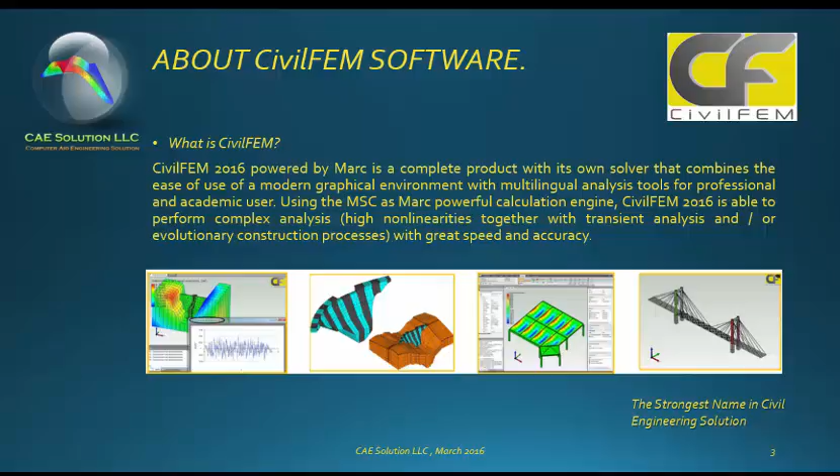Let's talk about some features of CivilFEM. We have a very user-friendly and easy to learn software. It's very easy to learn, it's very friendly.

CivilFEM is configurable, including the ability to import and export geometry, and the user has the ability to enter data using parametric formulas. You can develop scripts and macros with Python language, meaning you can make your own routines according to the requirements or needs of the client. We have object-oriented architecture, automatic analysis and reporting. It's a very easy to use software.

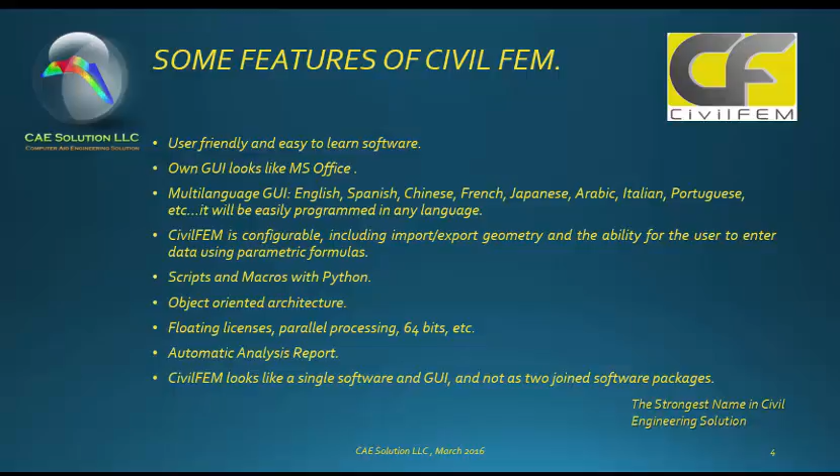Let's talk now a little bit more about CivilFEM software. CivilFEM is a multiple integrated software because it works simultaneously with a powerful solver with the Marc technology. At the same time you can perform Python scripts, as I told before. You can develop macros, you can have your own parameters, and all of this information is parallel, is simultaneous.

Also, you can have advanced civil engineering applications such as bridges, dams, seismic applications, pre-stressed concrete, reinforced concrete, tunnels, geotechnicals. The software supports multiple languages and flexible units. Another important thing is that we can perform nuclear power plant design, and you have all of these characteristics together in one powerful software. That is CivilFEM.

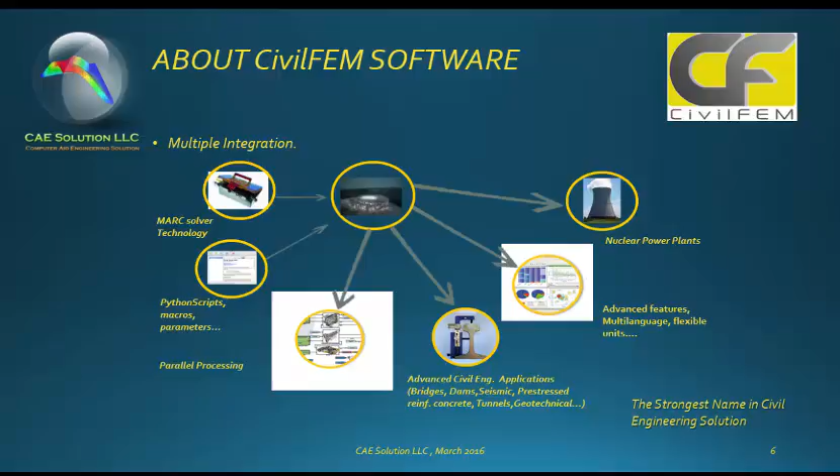If we talk a little bit about CivilFEM capabilities, in structural analysis we can perform linear and nonlinear, static and dynamic analysis. We can perform linear and nonlinear buckling analysis, modal and spectrum analysis, harmonic analysis. We can evaluate time-dependent variables like creep and shrinkage, among others. We can evaluate advanced material behavior. We can perform staged construction. We can evaluate cracking and crack propagation, heat transfer analysis, and seepage analysis, among others.

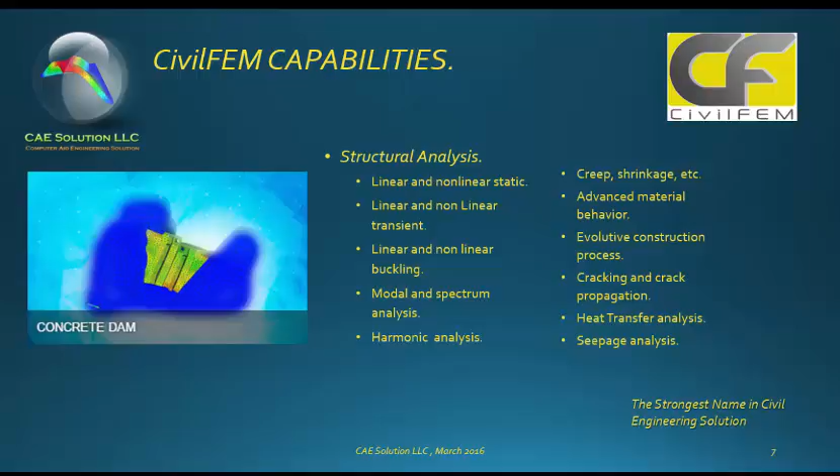We can handle and support a lot of material behaviors, such as isotropic, orthotropic, and anisotropic materials. We support different plasticity models, time-dependent behavior like shrinkage and creep, viscoelasticity behavior, and viscoplasticity behavior. We have temperature-dependent properties for heat transfer analysis. We can manage user crack data for crack propagation. We can perform nonlinear reinforced concrete analysis. We also have specific soil and rock behavior models, such as the elastic model, the Drucker-Prager model, Mohr-Coulomb, among others.

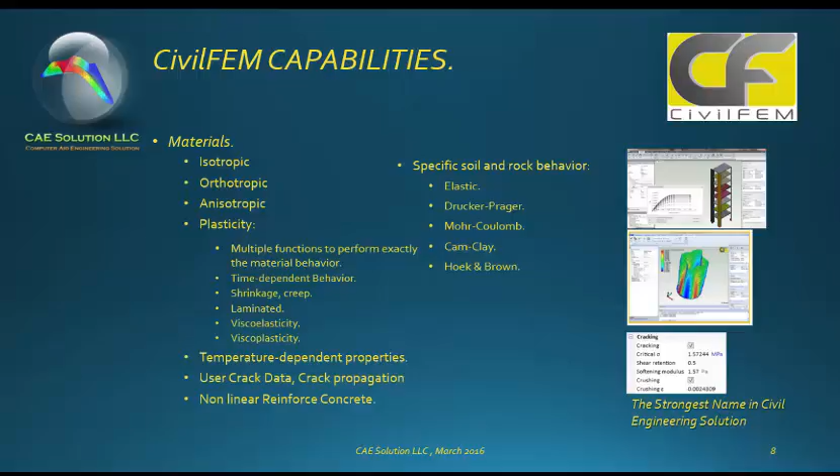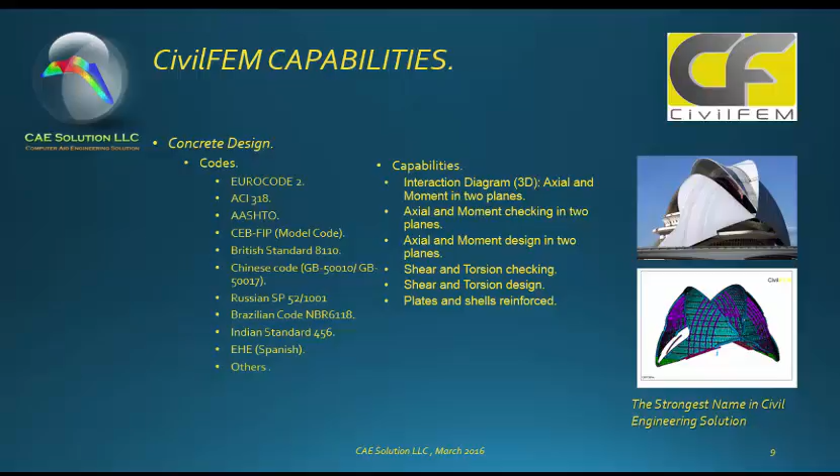In concrete design, we support a lot of codes, as you can see in the slide, such as ACI in the United States, Eurocode, the CEB-FIP model, the Russian code, Brazilian code, among others. Other capabilities in concrete design include interaction diagrams in 3D, axial and moment checking in two planes, shear and torsion checking, shear and torsion design, and plate and shell reinforcement. We also support a lot of steel design codes, such as Eurocode 3, AISC both ASD and LRFD models, bridge design specifications, British standards, Indian standards, among others.

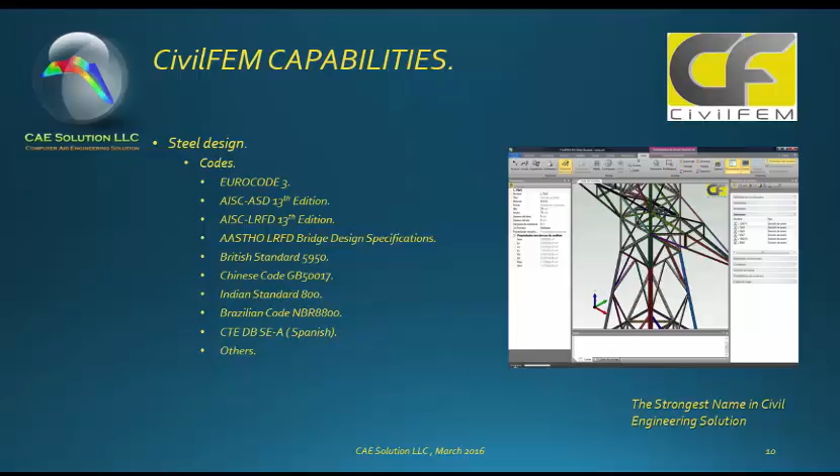CivilFEM is discretized into several products, such as FEM Intro, FEM Advanced, Expert, add-on Marc, nuclear power plants, and the student versions.

Let's start talking a little bit, showing FEM Intro. Basically, FEM Intro is the software that works on structural civil engineering and structural problems, such as earthquake analysis, among others, with basic nonlinearities and dynamics.

The specific civil engineering and structural analysis outputs, such as load path history, automatic response spectrums for seismic analysis, and nonlinear time history analysis, are fully supported here in CivilFEM Intro. We have highly accurate solutions because all material properties are time dependent and allow the definition of true stress-strain diagrams and advanced nonlinear behavior.

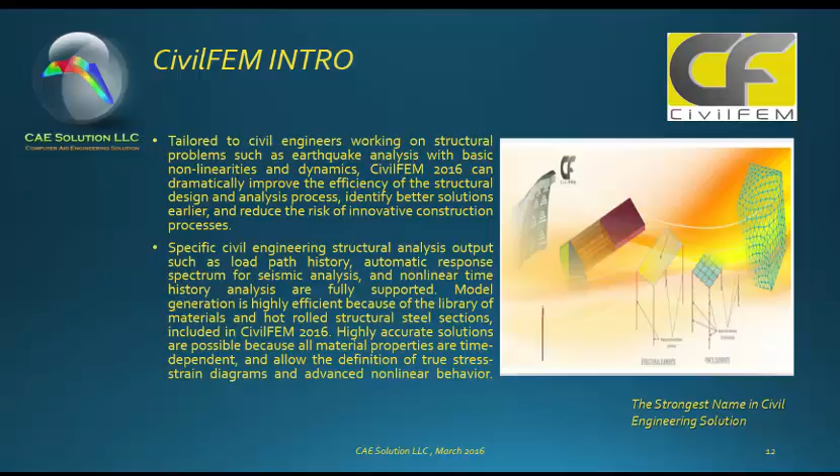In CivilFEM Intro, we have linear structural simulation with some nonlinearities. We can perform static and transient analysis, nonlinear transient analysis, modal and spectral seismic analysis. We can check all design requirements according to steel and concrete codes. We can evaluate large deflections and large strains.

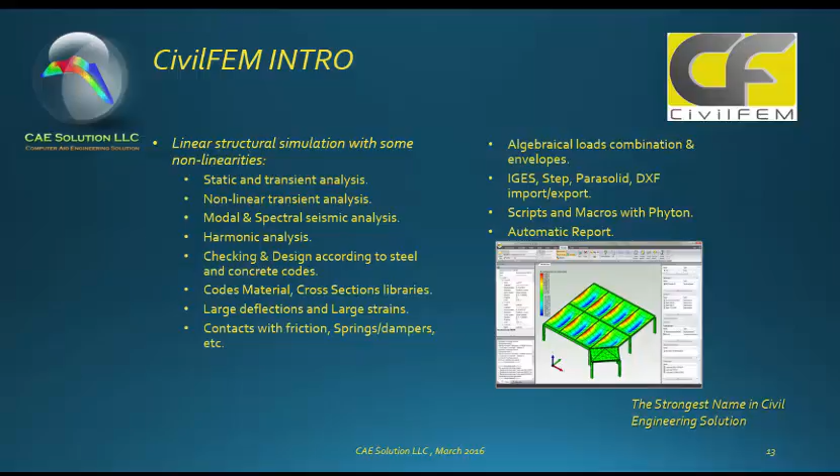We can evaluate contact with friction using springs and dampers, among others. We can import or export from different applications or formats such as DXF, Parasolid, among others. We can have scripts and macros made to our needs with Python, and make automatic reports, among other things.

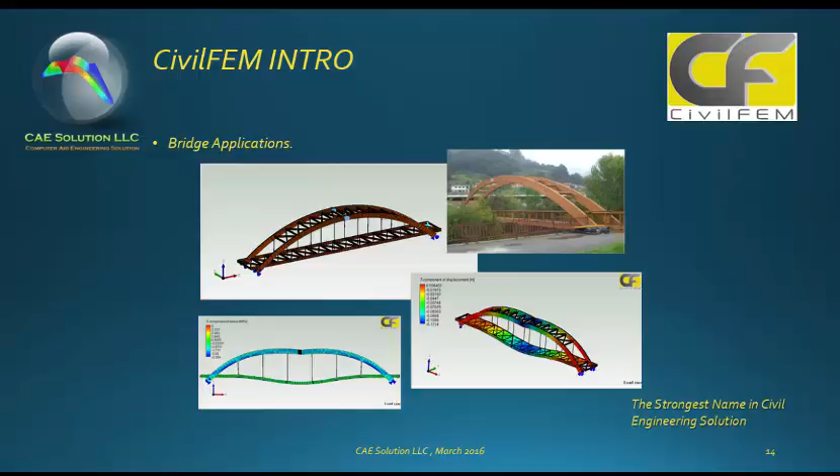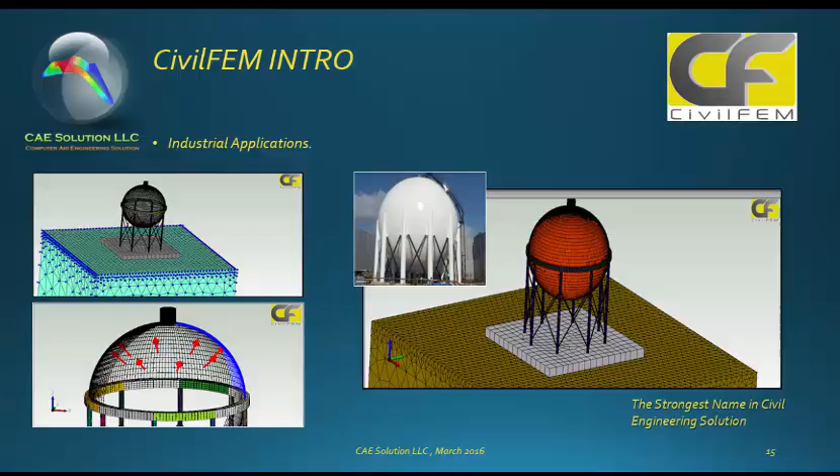In CivilFEM Intro, you can see several applications. For example, in bridges, you can check the deformation and stresses of the structure. We also have industrial applications, and steel static and nonlinear analysis for transmission towers.

We have seismic analysis tools, with user spectrum definition independently from the code. You can enter and make your spectrum no matter what code you're using. There's also automatic mode combination according to the code specifications when you're making spectral response spectrum analysis.

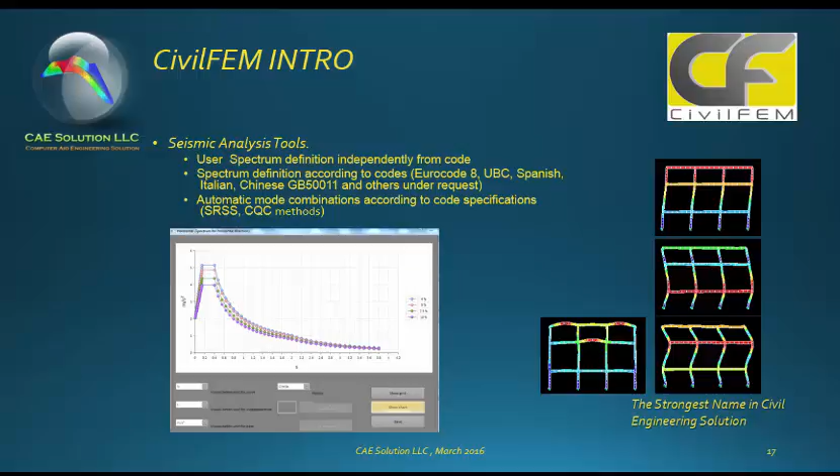In this slide you can see the model of the Tacoma Bridge study case. It was modeled in order for us to evaluate and compare the behavior that bridge took on at that time.

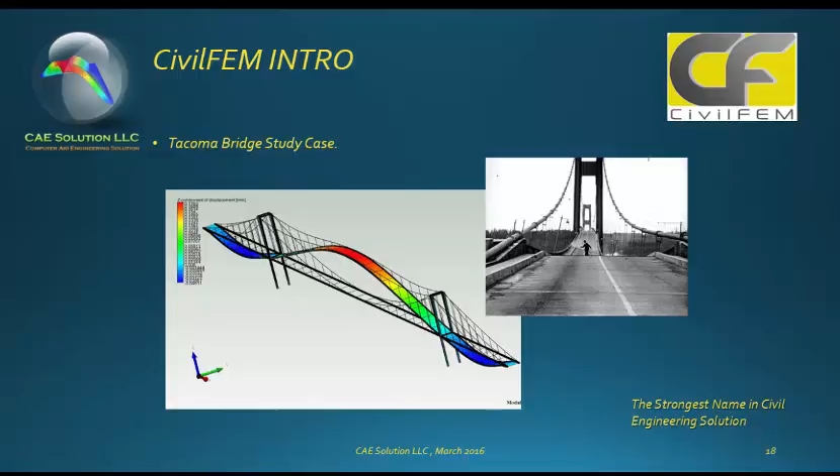Let's talk a little about CivilFEM Advanced. It has the same capabilities as CivilFEM Intro, plus nonlinear buckling, nonlinear evolutive construction process, nonlinear strain-stress diagrams taking into account plasticity and user crack data, nonlinear reinforced concrete analysis, concrete time-dependent properties such as creep and shrinkage, the material model exponential cap, user crack data, prestressed reinforced concrete, bridge tools, tunnels, retaining walls analysis, piles and micropiles analysis, among others.

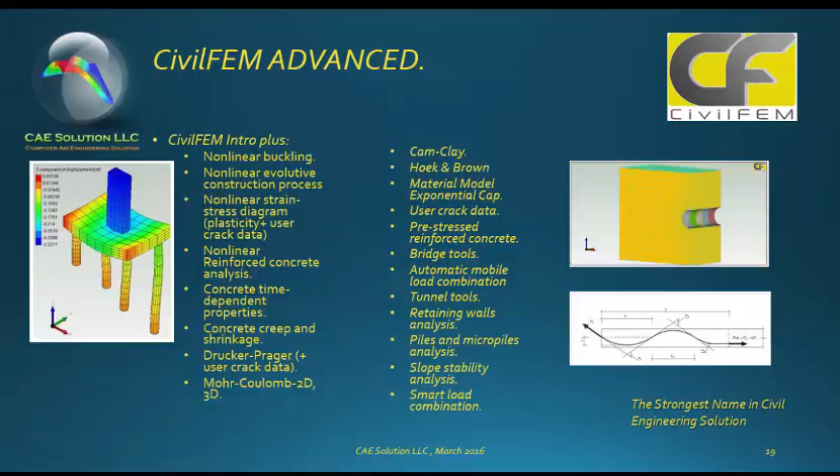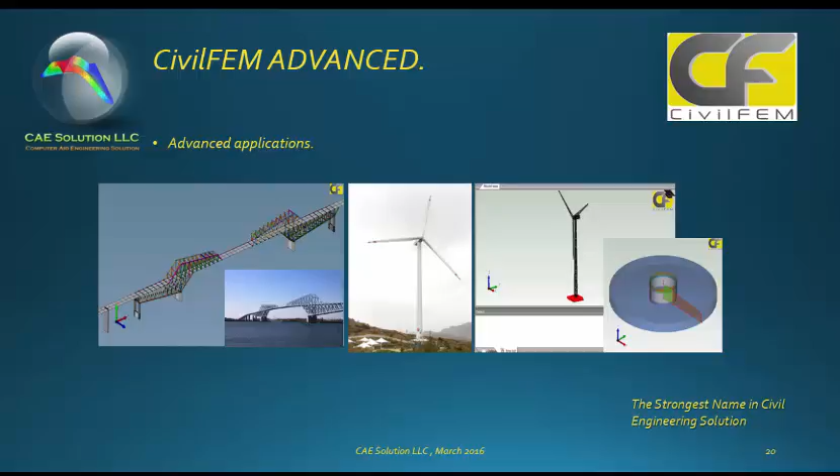Here you have advanced applications of CivilFEM in bridges, wind turbines, and foundation design.

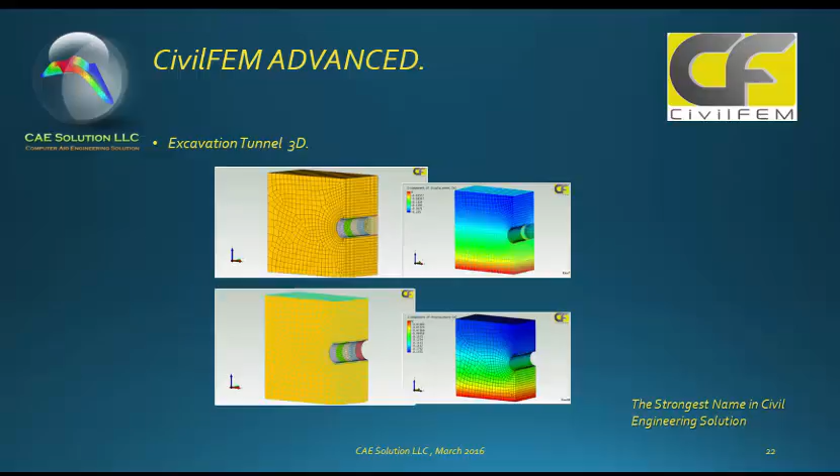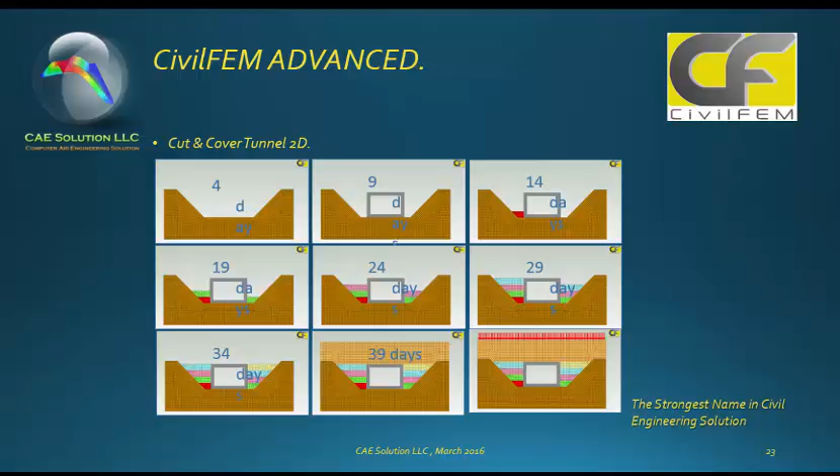You can also have staged constructions in tunnel applications. Here you can see, as a function of time, how the construction process, stresses, and results vary over time.

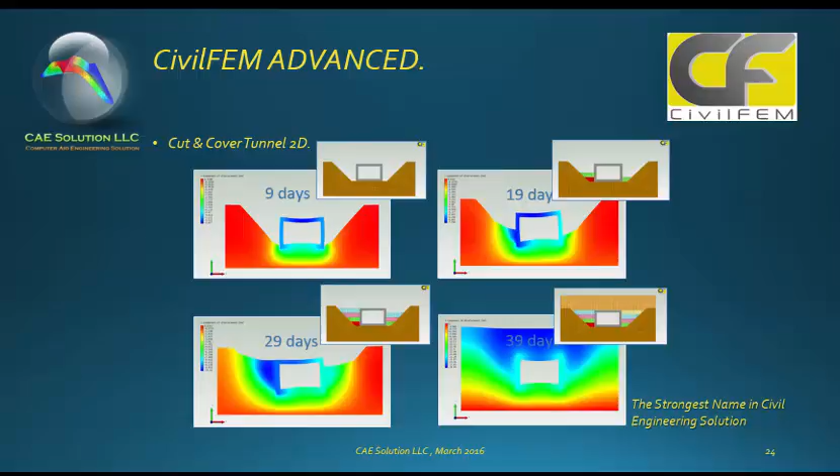As I told you before, you can evaluate and perform retaining wall behavior, taking into account all interactions between the soil and the structure of the retaining wall.

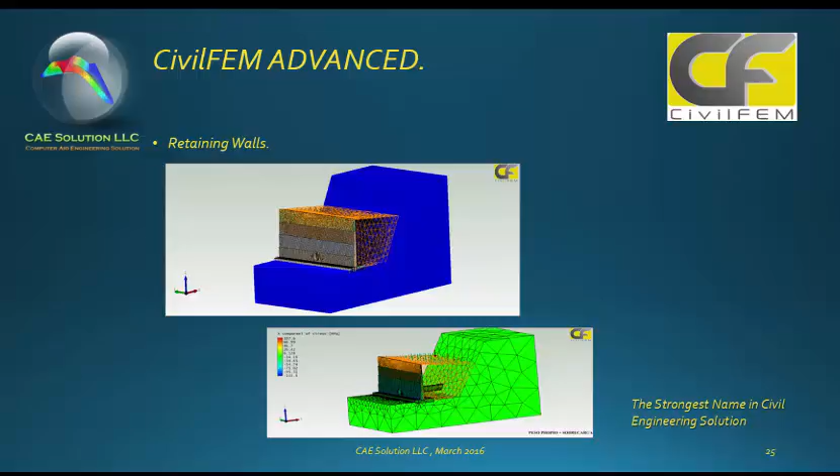We can perform nonlinear time history analysis on a 3D dam, for example.

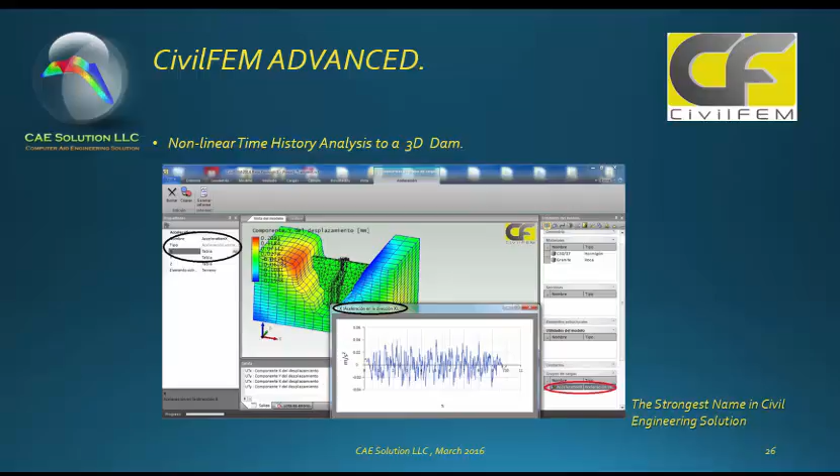In CivilFEM Expert, as I said before, it has the CivilFEM Advanced characteristics plus crack propagation, conversion of solid to shell model, laminated material, heat transfer, and seepage analysis.

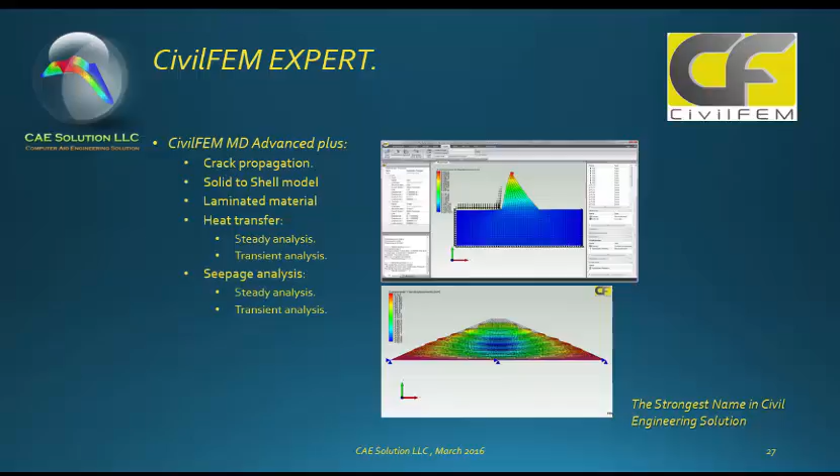In CivilFEM Expert, you can make construction phases. For example, in this image you can see the construction phases of a dam, in which we could evaluate the thermal nonlinear behavior when making this construction process, and how it affects the final structural behavior of the structure.

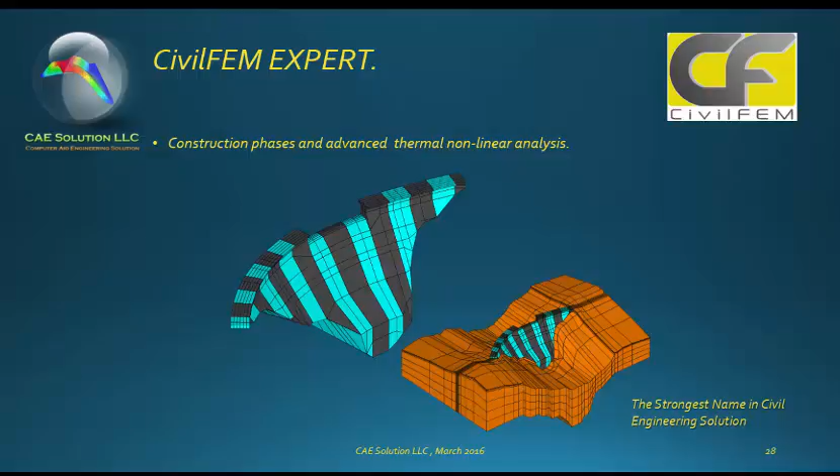In nuclear power plants, we have the capability of validation and checking of the built-in nuclear codes, such as ACI, ANSI, ASD, and LRFD, among other codes.

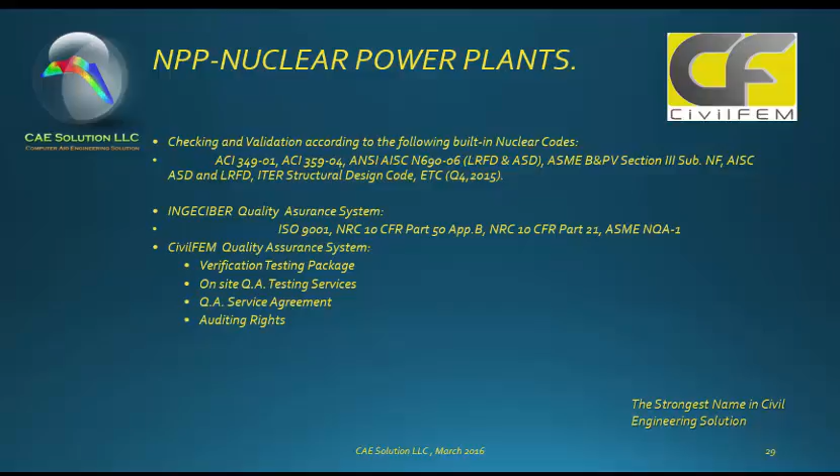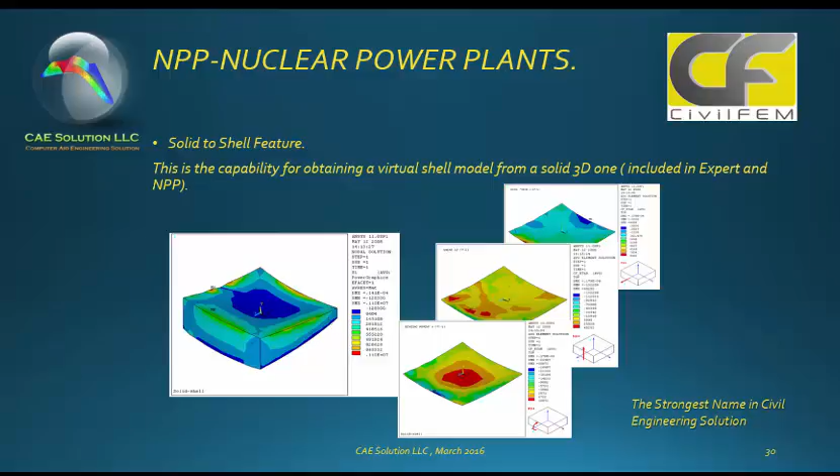In the Postprocessor, which is where we plot results, we handle three different types of information. We have nodal results in terms of displacements and rotations, reactions, fixed boundary conditions, releases, and similar data. We also have element results, which are derived data such as generalized stresses and strains, forces and moments, axial, bending, shear, and twist. We can also evaluate the curvature for each of the elements we are studying.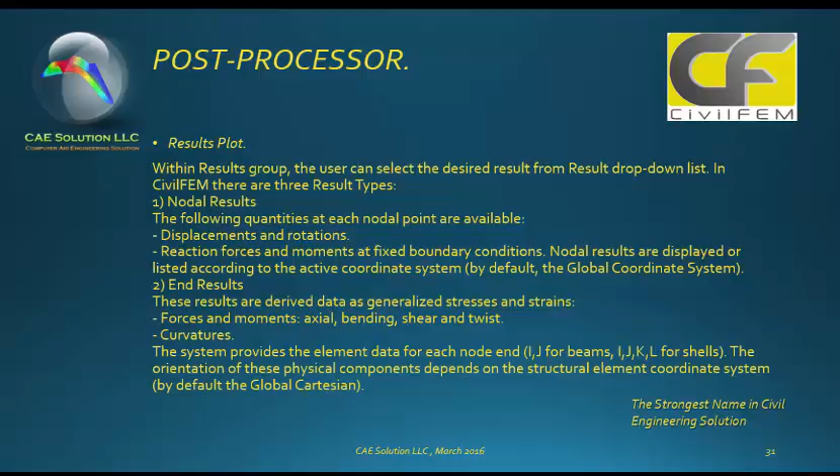And we have element results. We display the solution results as a continuous contour across the element boundaries. We have stress and strain components, such as elastic and plastic, equivalent stresses and strains, among other things.

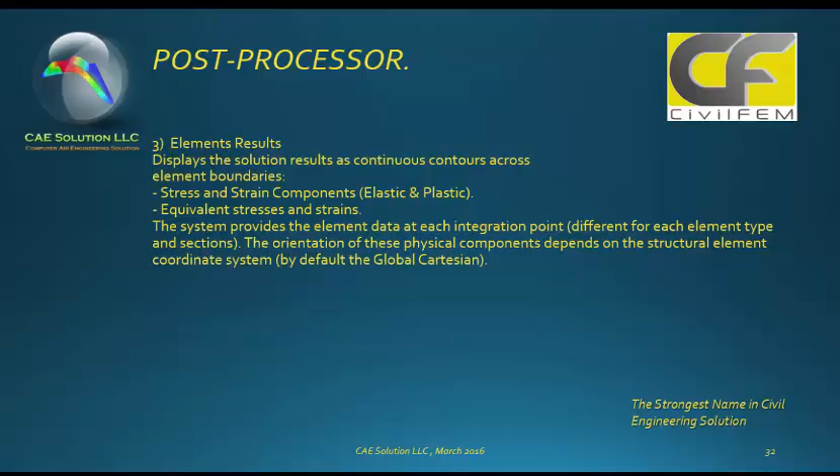I'll show you an image of the Postprocessor, where you can see how the stresses, strains, and deformations are evaluated in contours along the element.

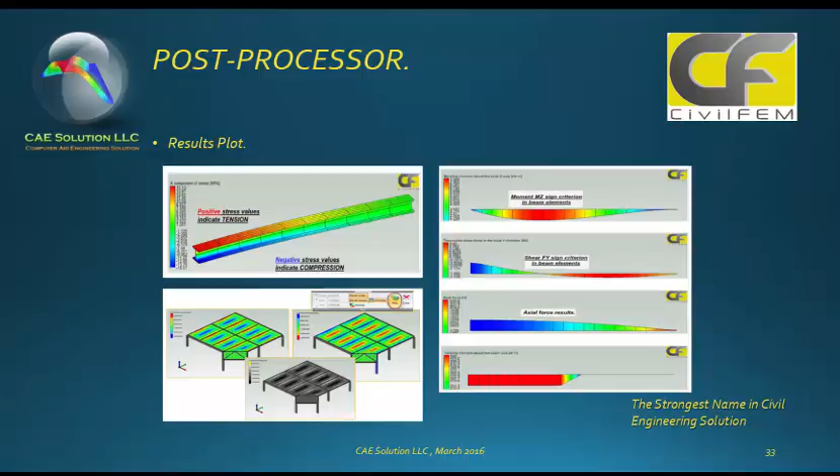We have automatic report generation, which allows us to make a report at a glance with a click.

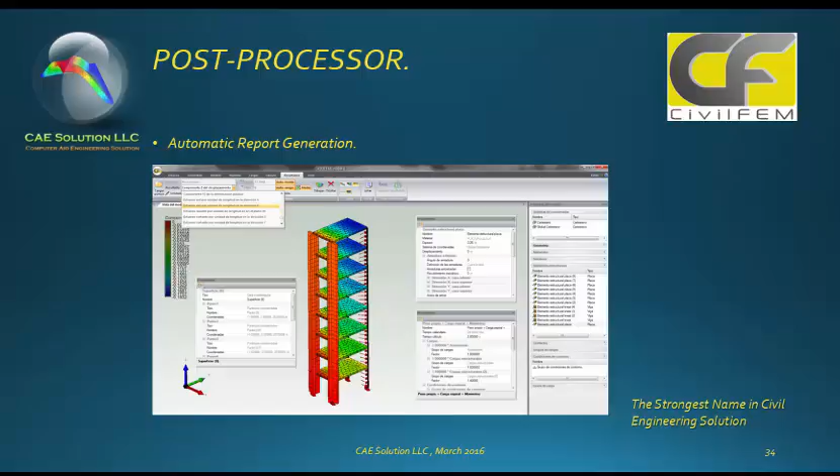Now I would like to present a little video example. This is a cantilever beam subjected to a point load, and over time we can see how the crack propagation develops.

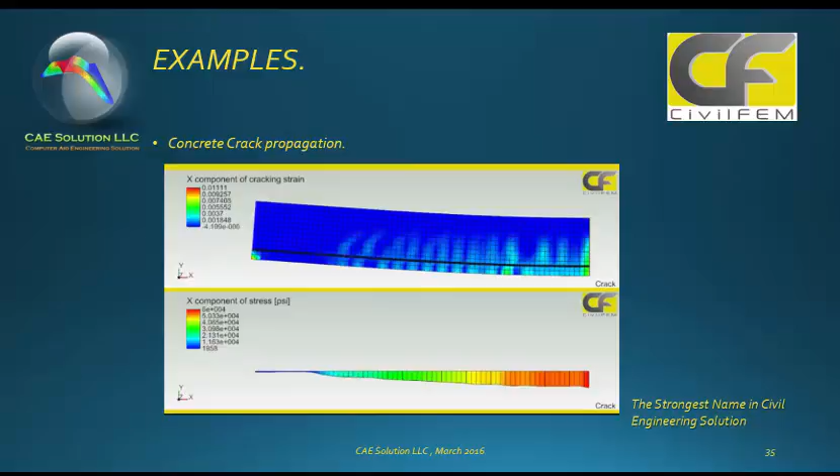Okay, I'm going to stop here.

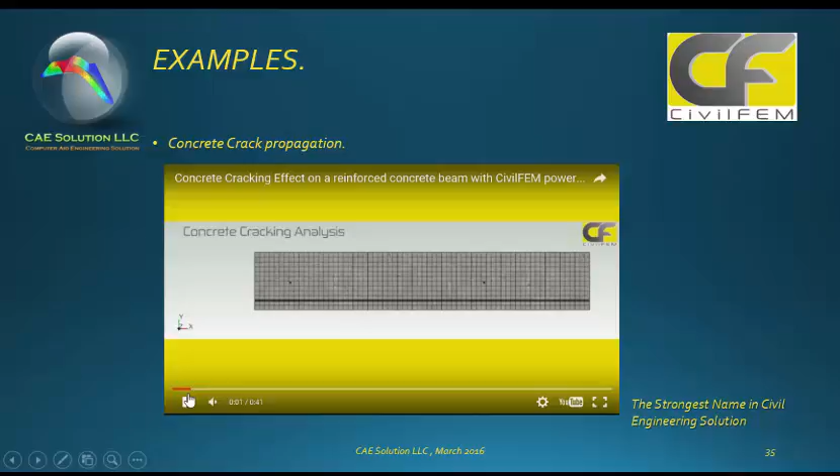In our consulting services, our international practice in the field of civil engineering allows us to provide the latest technology in structural engineering consulting services. We are always performing research in finite element methods, joined with institutes of technology and structural engineering universities. So we are proud to offer our clients consulting services in structural design and in the whole civil engineering field.